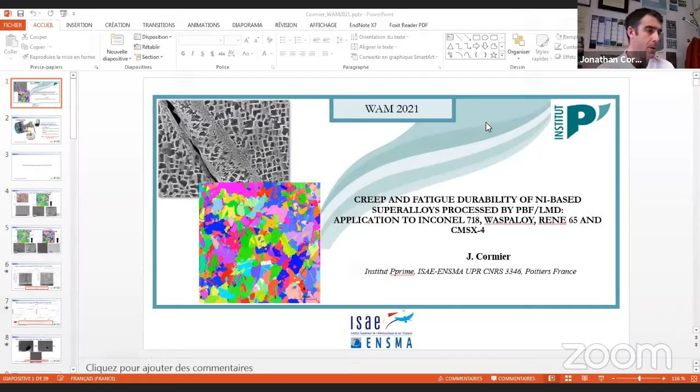Thanks, Guillaume, for the nice introduction. So I will share my slide. Oh, I think it's not this one. Just a moment. Okay, can you see my slides?

Yes, okay great. So today my talk, being in an engineering school like ISAE-ENSMA, naturally we are working on applications for aerospace. My talk today will be mainly focused on mechanical properties of high temperature materials processed by additive manufacturing, more specifically powder bed fusion and laser metal deposition.

My talk will be focused on different kinds of alloys, ranging from 718, WASPALOY, RENE 65, and CMSX-4.

So to start with the context of this study, we deal with materials which are typically used for the hot sections of gas turbines, not only for aero engines, but also for industrial gas turbines, or sometimes petrochemical applications or turbochargers for cars, Formula Ones. But we mainly focus today on applications for jet engines and helicopter turboshaft engines. Those alloys are used for the manufacturing of discs, seal rings, and airfoils, blades of the hot section, so for the HP sections, low pressure turbine sections, but also for the very last stages of the compressors.

Here you have the typical temperature during service of those components, ranging from 400°C in the bore sections up to 700°C for the rim sections. Regarding airfoils, especially HP sections, we are ranging from 500 to 700°C for the blade roots, up to 1150°C at the blade tips.

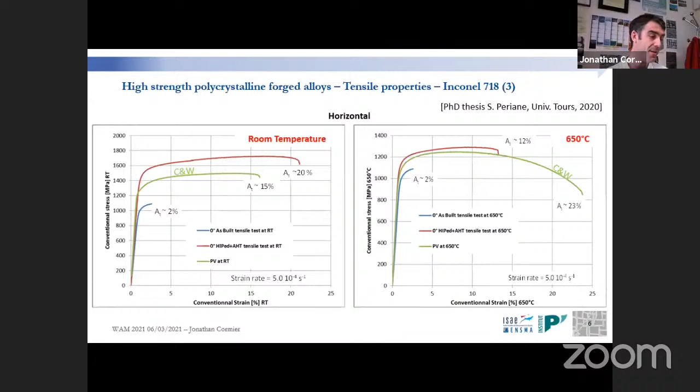From a failure point of view, we can see this linked to the lack of ductility. Crack initiation is mainly coming from lack of fusion and pores remaining in the as-built material, while in the HIPed state we don't have any more, or very few of them, at the end.

If we move now to creep properties, we have been testing creep properties at 650 C, 800 MPa and 750 MPa, with the same time scale here, in which we compare the powder bed fusion 718 - the red curves here - and two types of forging: hydraulic pressed forge 718 and screw pressed forge 718, the processes used for processing HP discs and LP rings for aero engines. What we can see in both cases is that the curves are pretty much the same in terms of primary and secondary creep stage, up to 1 to 2% creep strain.

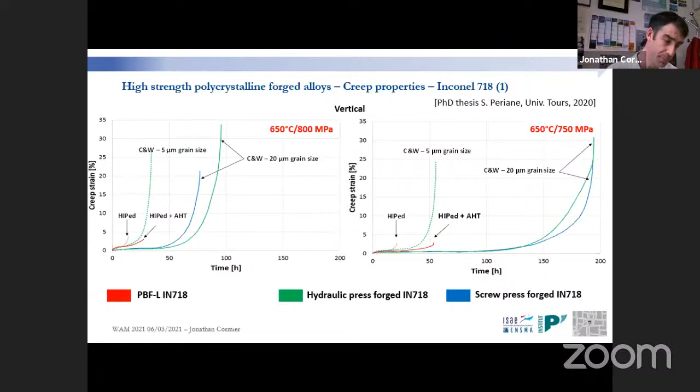Still, there is a very pronounced lack of ductility, which prevents the alloy from being used in that state for such high strength, high integrity components. The main reason behind that, as you will see later, is that even in the heat-treated state we always have some remaining pores, small ones, where we probably have gas trapped within them, but they serve as crack initiation sites and limit the overall ductility of the alloy.

Moreover, we have been able to observe crack initiation at specific grain boundaries. I'm not showing this here clearly, but we understood that it is linked also to some oxides remaining at grain boundaries. This kind of result is really typical in the literature.

That's something which has already been observed four years ago by a Japanese team in the group of Koji Kakehi at Tokyo Tech, where they compared the creep properties of vertical and horizontal specimens. I forgot to mention that the results we obtained were within the framework of the S. Periane thesis. We had a little bit of anisotropy, but the trend was almost the same for both vertical and horizontal specimens.

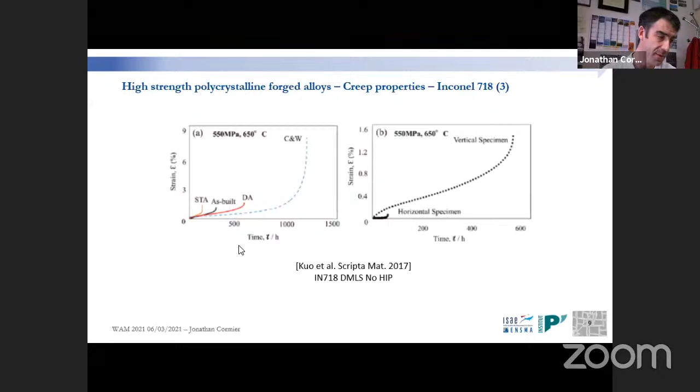If we come back to the very pioneering work coming from Oak Ridge National Lab, the group of Michael Kirka and Suresh Babu, they made the choice quite rapidly to work with EBM processing. They observed that for specimens loaded along the build direction, the microstructure for this kind of process leads to a very columnar type microstructure. They observed very high properties, comparable or sometimes even surpassing the creep properties of cast and wrought material. But when loading along the transverse direction, they come back to the same problem of deficit in ductility.

This kind of anisotropy in creep strength, found for both PBF-E and PBF-L processing, is not something specific to this class of processing - it's not specific to AM. It's really specific to the columnar type or directional type microstructure we have, in which we know that if we don't have any particles or something specific to strengthen the grain boundary, we have an overall lack of ductility, and that's something well known in the literature for directionally solidified cast superalloys.

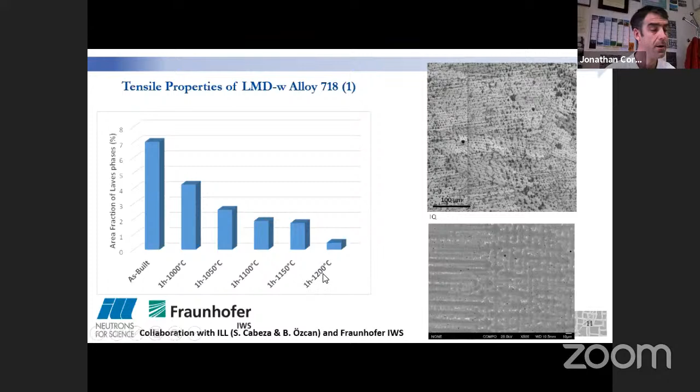So in the following slides, I will show you that we are using solution treated specimens to understand the properties, with the solution treatment being 1 hour at 1200°C.

With this, we have been doing tensile tests along the horizontal direction, vertical direction (build direction), and also at 45 degrees. All the tensile tests have been done at the same strain rate, 5×10⁻⁴ per second, at room temperature, 450, 650, 750, 850. So I will first start with the room temperature test.

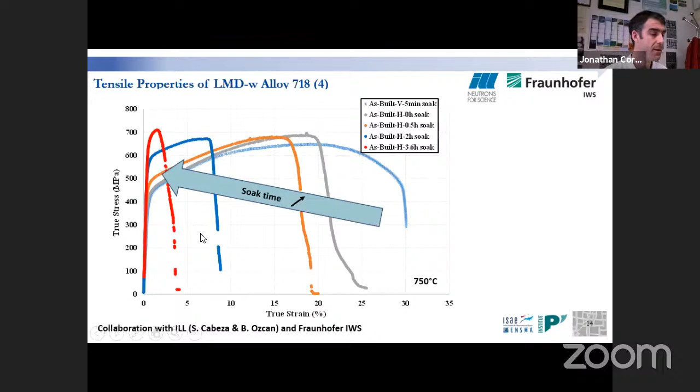While the decrease in ductility we suspect to have environmental embrittlement of grain boundaries. So it means that we need to take great care on the testing procedure if we want to characterize the properties of this class of alloy, which is unstable in this temperature range.

Okay, so after those monotonic properties, I want to move to something really important when we need to consider certification rules of components for aero engines, so the fatigue properties especially. According to the literature, focusing on AM material, I'm still considering the case of 718, which is a weldable alloy.

I just want to summarize rapidly that most of the issues are coming from processing defects, typically lack of fusion and pores. And as long as we have this kind of defects inside the materials, the anisotropy, the way the specimen is built, is not really important in terms of texture, for example.

So if we want to be able to characterize intrinsically the properties of this class of material, we need to get rid of defects. That's also something interesting for wire deposition, being a process in which we know we have lower porosity in terms of volume fraction and/or size.

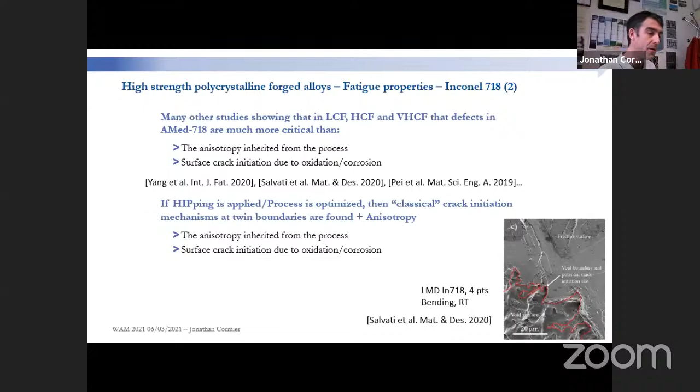So we have been working in collaboration with GE Additive in the US and with a colleague from the University of Arizona, working on Rene 65. So an alloy very difficult to print, with a very high volume fraction of gamma prime precipitates.

And we have been studying the alloy along vertical and horizontal directions, using combined solution treatments plus HIP. These are optimized processes to be able to get rid of porosity. We have typically less than 0.1% pores. I cannot give all the details on this.

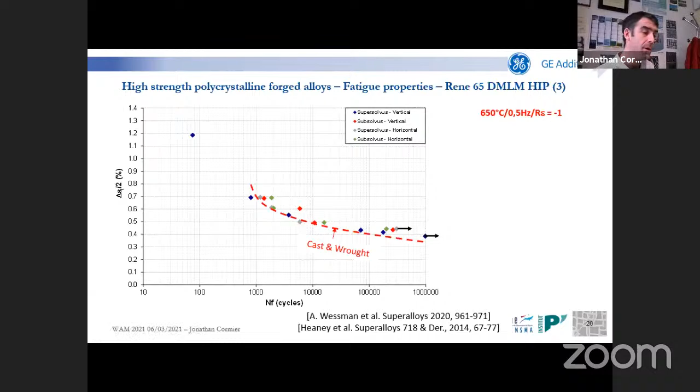From the point of view of crack initiation, we observe almost the same crack initiation as for the cast and wrought material, meaning surface crack initiation at this temperature. That's really typical. We have crack initiation at twin boundaries assisted by oxidation. And very occasionally, we obtained crack initiation from an internal site at a particle, non-metallic particle, typically an alumina type particle coming from the processing of the powders. Most probably, I don't have all the details from GE on this.

So that's something very interesting in terms of the possibility of introducing this class of material for high integrity components. Still, we need the HIPing stage. But there are no other possibilities.

Now I'd like to move to something really fancy. We are working in collaboration with the colleagues of the University of Erlangen, and more specifically with the group of Carolin Körner. There are 2 groups on Earth able to grow, I would say, almost single crystals. So it's not really single crystals. You can see here a specimen, which has been processed by powder bed fusion electron.

You can see that with this optical observation, you have this central part, which is basically almost single crystalline. And the strategy here, like for Bridgman casting, is to establish an almost vertical thermal gradient during processing. So a very hot process overall. They are obtaining a very, very small dendritic structure with primary dendrite arm spacing of typically 10 to 20 microns, meaning that you can then do solution treatment at lower temperature or shorter durations. They have been able to obtain a microstructure very similar to a conventionally processed single crystal.

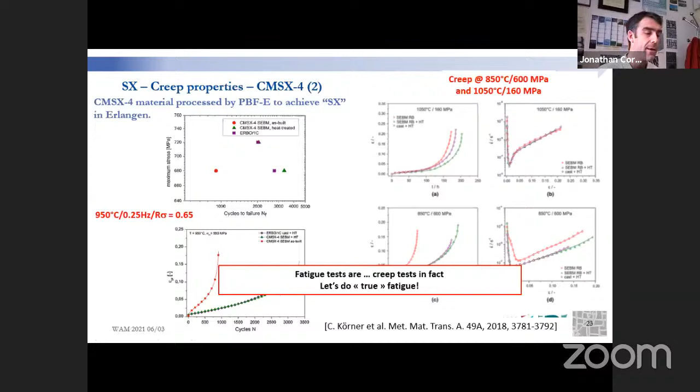So what we did, we decided to work together and do a true fatigue test, and especially to do VHCF, very high cycle fatigue tests. There are very few teams able to do this kind of test on Earth, only 3 teams: one at UCSB and University of Michigan within the groups of Professor Pollock and Professor Wayne Jones, here at Pprime, and another group in China at Beijing Institute of Technology, working closely with Leicester University.

Basically, the principle is to design a specimen so as to reach the frequency of resonance of this specimen at 20 kilohertz. Those conditions are really important from a certification point of view, because airworthiness authorities are imposing criteria with respect to high cycle fatigue, very high cycle fatigue failure at such frequencies, because a blade can vibrate in bending mode during service, and we need to take into consideration possible failure due to this.

So the machine we have, and we have a second machine under development here, we are typically using induction heating, temperature measurement with a pyrometer, and we are coping with possible self-heating during the test. We have been able to establish a very, very large database, probably the largest on Earth for this class of material at 1000 C. And that's not all the data points we have. We are more than 400 data points at this condition, with results up to 10 to the power 10 cycles. Most of the tests have been done by Alice Cervellon and by this lady, Luciana Maria Bortoluci Ormastroni, working on CMSX4 processed by additive manufacturing.

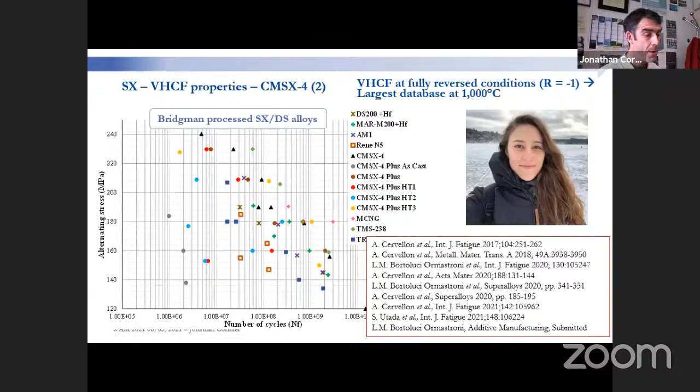I'd like to show you more specifically the results on AM process CMSX4. Here we have a database of CMSX4 processed with large casting, meaning very large casting pores. Database of CMSX4 processed with small casting pores. And in all those cases, we have crack initiation at internal pores, the largest ones. Here you can see AM specimens which failed almost immediately because we had the presence of high-angle grain boundaries.

I just want to go back a little bit earlier. If you can see here in those blanks, we have polycrystalline shells around, and when we do a heat treatment or when we add a HIPing stage, we may have a growth of this layer up to areas from which we are removing our VHCF specimens. And from this, we can see that the VHCF test is really a killer test because we have almost immediate failure.

Also, during those tests, something you can observe from this SN diagram is that we have not been able to achieve very high alternating stress simply because we have been facing self-heating. And the reason behind that is that the material is full of dislocations inherited from the process, and we have difficulties getting rid of those dislocations.

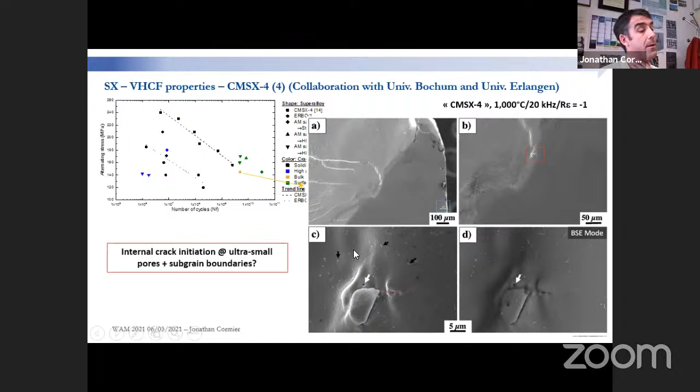And we have been able to observe crack initiation from an internal site, which should be, and we are not 100% sure about that, a low-angle grain boundary, because it was a HIPed specimen. And all the other specimens failed from the surface through an oxidation process. That's the longest ever test we did, which lasted more than 500 hours.

So I don't want to go into too much detail on the failure process because I think I will be lacking time. But with those experiments, we have been able to identify an environmental limit for this class of material, and probably there is no fatigue limit for this class of material, whether processed by conventional processing, so Bridgman casting or liquid metal cooling followed by HIP, or processed by additive manufacturing.

Okay, so now I want to finish regarding the question of additive manufacturing as a repair technique. That's where the market is. Personally, I really trust the fact that this is where we should introduce additive manufacturing for aero engine applications and for repair purposes. So we have a large program running here at Pprime with the collaboration of Safran Aircraft Engines.

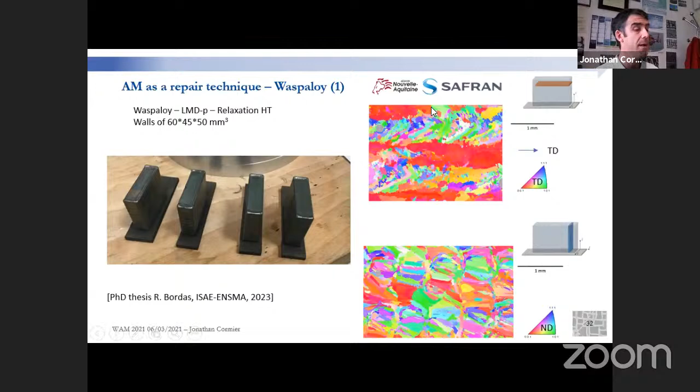And the first thing we are studying is the role of heat treatment. Since we are repairing components, the question is what kind of heat treatment we can apply without degrading the properties of the substrate we want to repair, but improving the properties. And that's a tricky issue.

And what we learned from that process is that just after the CMT process, we are out of equilibrium. And that's important when you think about the relaxation of residual stresses, because on the one hand, you introduce residual stresses due to the thermal field and the buildup of dislocation density within the material during processing. But on the other hand, you need to think about improving monotonic properties without degrading the substrate, which is a tricky issue.

And we have experiments starting next week with Sandra on the Salsa line to understand how we can develop heat treatments to both relax stresses and trigger precipitation to optimize subsequent in-service properties.

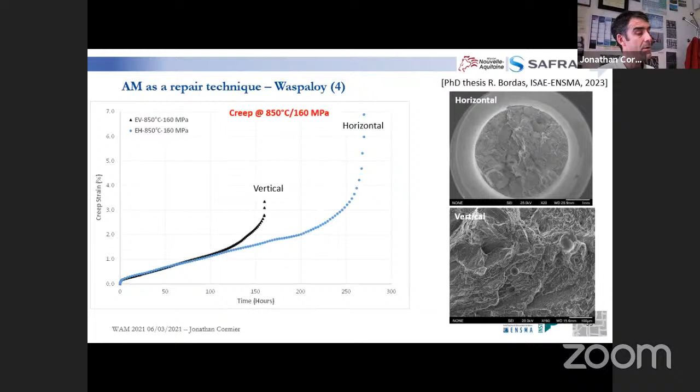This is something we are understanding from the pore size distribution and spatial distribution within the build. We have plenty of results; I'm just showing two typical ones. We also did vacuum tests whose creep life in this condition exceeds 800 hours. That's something we are also trying to understand.

Finally, the key challenges for us are the following. Here is a typical component we want to repair. I cannot give exact dimensions since that's confidential, but it's a part having a diameter of nearly one meter, and we are repairing the sealing parts, which are typically a couple of millimeters in thickness and a couple of millimeters in height.

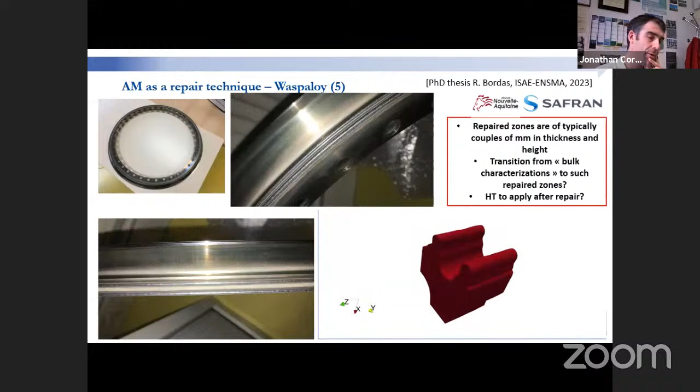Here you have a tomography reconstruction of this kind of repaired part, and we have a given pore distribution typically different from the one we have in the walls. Our strategy is to build walls with different processing parameters, meaning different pore distributions, so as to probe the mechanical properties of those very small parts from which we are not able to extract specimens for conventional creep and fatigue tests.

That's a very specific topic for which we need modeling tools to approach the properties of those parts, which are typically submitted in service to creep deformation and fatigue fretting issues. To conclude, for this class of material, high-strength nickel-based superalloys, fatigue properties and, to a lower extent, creep properties are mainly controlled by defects inherited from the AM process, typically pores and lack of fusion. Once these defects are removed or limited through HIPing, for example, anisotropy and environmental degradation may contribute to creep and fatigue properties.

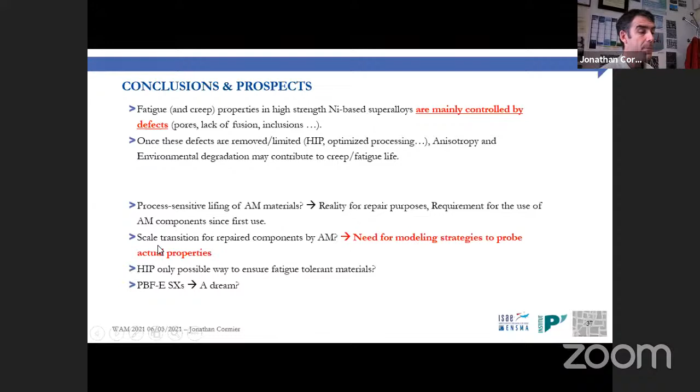I don't want to read everything here, but we really need to develop modeling strategies to probe the actual service mechanical properties. With this, I'd like to thank all the colleagues, collaborators, and companies without whom this work would not have been possible.

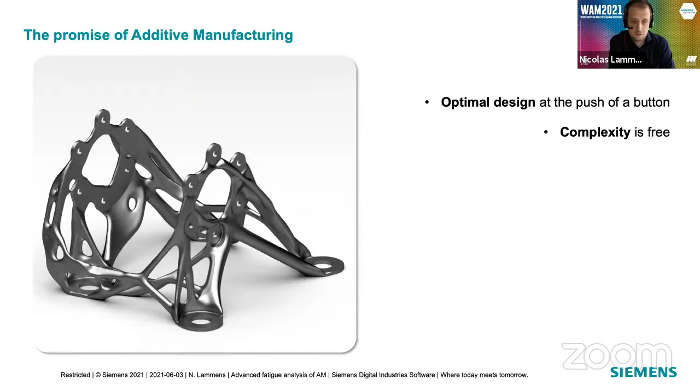Now, in itself, that's all very nice, but if we look at what the cost is of this extra freedom that we get, that introduces us to the problem of performance prediction of additive manufacturing.

What's happening is that all this increased flexibility we have, all this process control that we get, leads to a significant increase in complexity.

If we talk about performance and focus on fatigue life, in a normal analysis you would consider three distinct properties: the geometry of your component, the material that you're going to use, and the loads being applied to your component. If you know these three as individual properties, you can predict a fatigue life. That's the normal way of looking at fatigue for conventional manufacturing.

But when you step into the domain of additive manufacturing, you have to start taking into account the manufacturing process itself. Because of that single extra layer, all these domains start to interact with each other. The material performance becomes dependent on the manufacturing process itself, but also on how you orient your component within the build chamber, on the printer settings used, and on the geometry that you have—thin-walled features will have local material properties that differ from the bulk material. Also, if you cannot print the precise geometry, or have features you must redesign because of the printing process, the load introduction might be different. So everything starts to interact with everything, and predicting fatigue life becomes even more difficult than for conventional manufacturing.

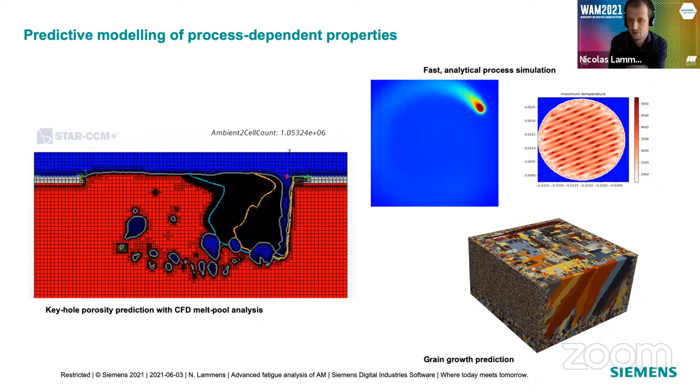And if we have those, we can actually look towards things like grain growth prediction, what you see here at the bottom. Our final goal is to be able to capture everything that happens during the printing process, to know what features you can expect in your component, and then to predict from that the performance of your component.

Now, to be able to predict the performance of the component, there is a second challenge. You not only want to know all the properties or all these artifacts, but you also have to be able to know how these will work together to get to a certain fatigue life.

If you look at the top picture here, this is a literature study done on Ti-64, additively manufactured Ti-64. And what you can see is that depending on the precise type of processing done on the coupons, you get a fatigue life that has a huge variation.

So this means that if you want to accurately predict lifetime of your component, you actually have to know pretty accurately all the process parameters or the precise condition of your component, because if you don't, you have no way of picking the right SN curve from this scatter plot.

What we know is that in order to predict fatigue life, we actually start from the AM properties—things like printing direction, post-treatment, energy, velocity—and all those properties affect the local properties. So not the global properties, but actually very local properties like surface roughness, residual stress, and microstructure. And all those local properties then finally come together into the final component fatigue life.

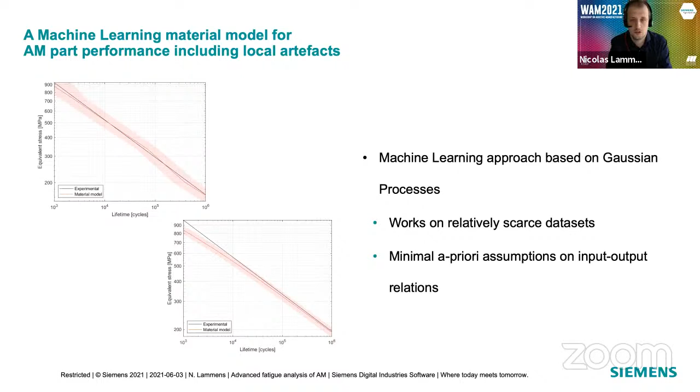To illustrate briefly the results we've achieved so far, I wanted to show some results from a steel turbine blade analysis. It was a 316L stainless steel. To build our fatigue material model, we started with simple coupon test data, doing high cycle fatigue testing. All of them were printed in 316L, but with a fixed set of processing parameters. The only things we changed were print orientation, surface condition, and the heat treatment applied. That gave us a small set of test data to train our machine learning model.

The input parameters we considered in this study were surface condition - the roughness of each sample - the print orientation, because we wanted to account for orthotropy in the material, and the heat treatment applied to the samples. The pictures on the left are two actual results from our machine learning using a leave-one-out principle. What that means is that from all the SN curves you have from testing, you take one out of the training data.

You train your model with the remaining set, and then you predict that one SN curve that you removed from the training data, and you compare it to the actual measurements. That's what you see for two different conditions here in the pictures. The red line is the mean prediction, the light red shaded area is the standard deviation, and the black marks are the test points.

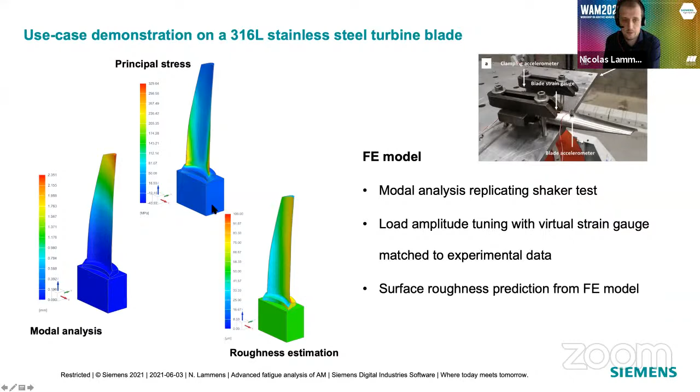And then if we look at the first results we got, if we just look at the durability results and the stress results, we see that failure is actually predicted at exactly the location where we saw it in each of the experiments that we did. But more importantly, if we look towards the actual numerical predictions, we see that we get still very good results.

And normally you have to account for that. You have to compensate for the notch effect. And we did not implement this yet in this study. So we are confident that if we would implement this notch compensation, that our prediction would match even better with our experiments. So that's a very promising result, but of course, it doesn't mean that we are there yet.

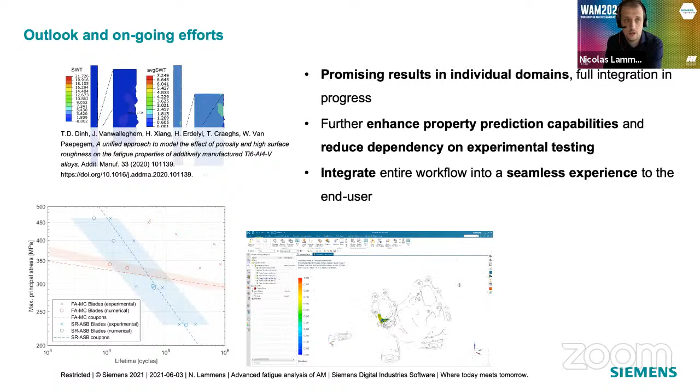So what we want to achieve then, first of all, we want to be able to predict these three different domains: the manufacturing process itself, the resulting material properties, and the individual properties such as porosities and microstructure. And then based on those properties, we want to predict part scale performance. Once we are able to predict that, we actually want to reverse the problem. We want to optimize the manufacturing process based on what performance we need to achieve. And ultimately, once we are there, this will enable us to tailor the printing process to achieve exactly what we need. And that will still, again, allow more optimal material usage, faster printing, and it will just reduce the cost of additive manufacturing. So that's the ultimate goal that we have here.

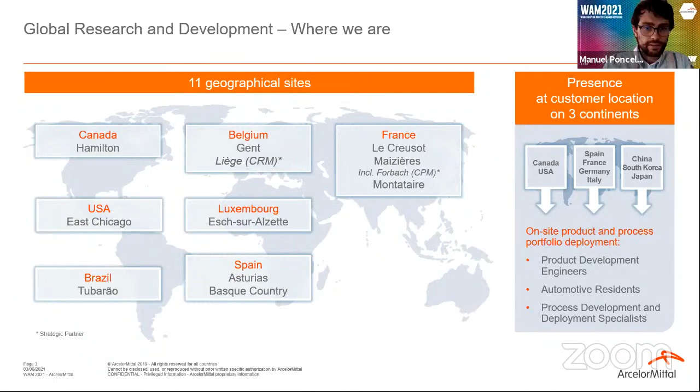Also, we have a big global R&D network located in 11 different places, most of them here in Europe, but also we have some in America, like the ones in Canada, East Chicago, and Brazil. We are in the north of Spain, where we have three centers, two in Asturias and one in the Basque Country. I belong to one of the centers in Asturias, which is called New Frontier.

Here we study or research hot topics like big data, machine learning, and data mining. This is the digital factory, new materials and nanomaterials, 3D printing, which is the department my colleague Juan Manuel and I belong to, sustainable resources focused on ArcelorMittal mines, and since the COVID-19 outbreak, we started to develop a new lab called BioLab for activities to fight against COVID.

So now entering into residual stresses in additive manufacturing. Usually people have a bad image of residual stresses because they can lead to catastrophic failures, especially when they are not accounted for, and that's right. But it's also true that sometimes residual stresses can be beneficial and are induced intentionally, for instance to improve fatigue performance, like shot peening or some examples that have been put on the table in previous talks from today. And why are they important to measure in additive manufacturing?

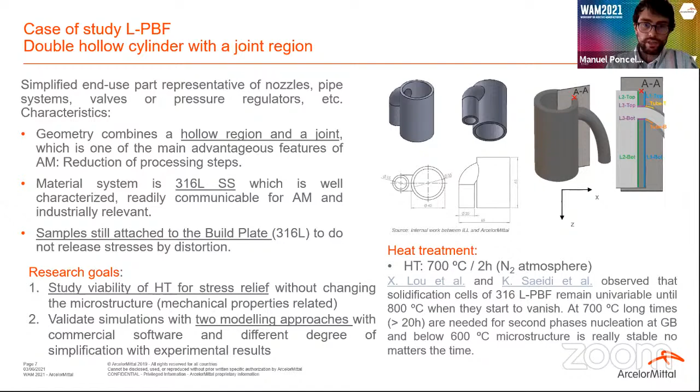So we did a metallurgical analysis of both components, the sample as built and the sample heat treated. We had already developed the printing parameters for this steel previously, so we could assure a full dense part without macroscopic defects — no porosity or cracks inside.

Looking closely at the microstructure by SEM images, we saw a very fine microstructure with fine cellular solidification cells, with average diameter below the micron. This microstructure was also preserved after the heat treatment, which is good — that's what we intended.

We measured this cross section by lab XRD, on both samples and also powder from the same printing batch, and we saw a mainly austenitic phase for this steel, which is not surprising, as this steel is very well known to be mainly austenitic. This is also an important input for measuring the residual stresses, to know the microstructure we have initially.

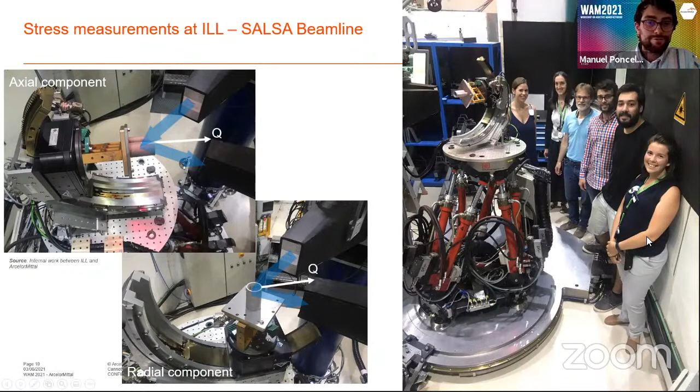So here is when we brought the samples to SALSA. We measured the three main stress components of the samples, aligned with the scattering vector — the axial component, the radial component, and also the tangential component. And here are the happy faces after successful measurements and results.

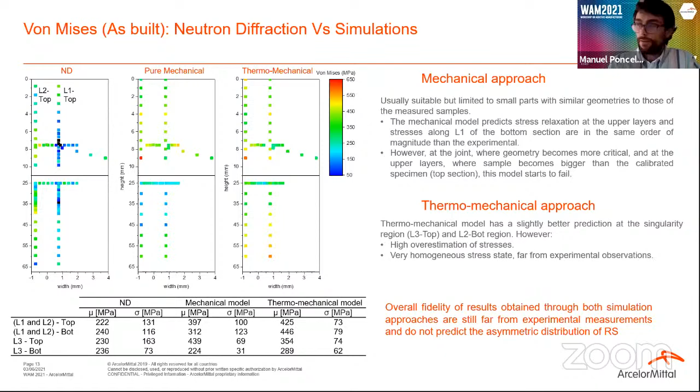So I conclude the talk, summarizing everything we were explaining. First, we propose a heat treatment for 316L in SLM that is good for reducing the residual stresses without modifying much the microstructure, which is what we wanted. In this line, we are now running tensile tests on specimens after this heat treatment to assess the mechanical behavior as-built versus after the heat treatment.

We compare the experimental results with two modeling approaches, and none of them predict accurately these stresses. This is because, first, the degree of simplification, the voxel size of the mesh is much bigger than the melt pool, and also because at the end of the day, the main purpose of both models is to predict the macroscopic distortion of the part, and they do it right. But what they do not do right now is predict the residual stresses.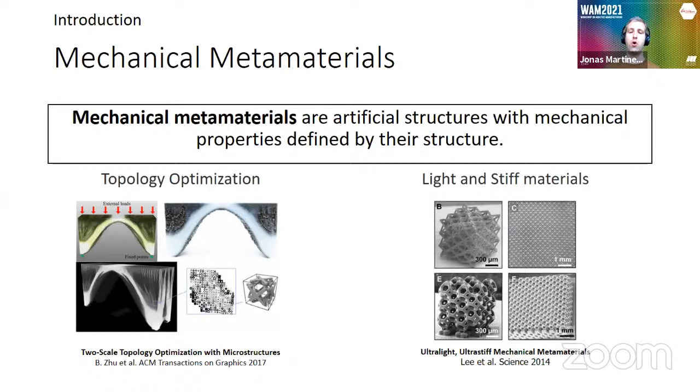Another line of research that has also gotten a lot of attention is how to do, at the small scale, materials that are at the same time light and very stiff.

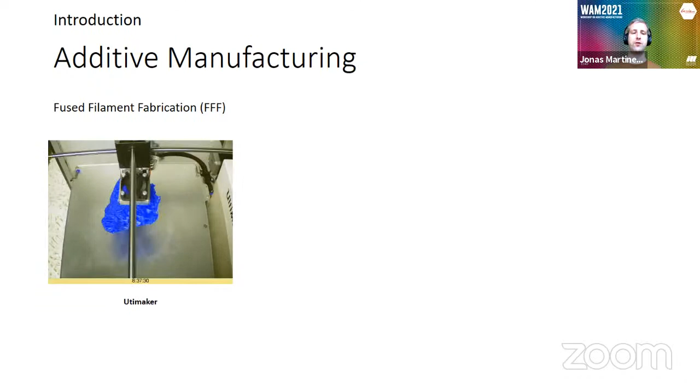I'll give an overview of additive manufacturing, but I think here the audience is pretty well versed on that. We consider in our department three different technologies. The first is the most widespread and inexpensive: fused filament fabrication, where you deposit material layer by layer usually.

We also consider stereolithography apparatus, where you are basically photopolymerizing, also layer by layer, but instead here you are not sending instructions of a path, but instructions of an image for each slice. And we also have some selective laser sintering machines.

What I want to bring to discussion is that when we're designing the algorithms to generate small scale structures, we have to take into account the fabrication constraints imposed by these technologies. So not all ranges of geometries are actually fabricable.

For instance, to take a simple example with fused filament fabrication, usually you need structures that are self-supporting, or you need the use of supports. So basically, the space of geometries that you can achieve is constrained.

Our common strategy in the works I'm going to present is basically to find a subset of geometries that strictly enforce the fabrication constraints, and that at the same time expand as interesting and wide a space as possible of elastic behavior.

The most commonly used method to do metamaterials is to consider a periodic arrangement of tiles. This is because we can very efficiently simulate the asymptotic behavior of this kind of tile, and also it's very compact for storage.

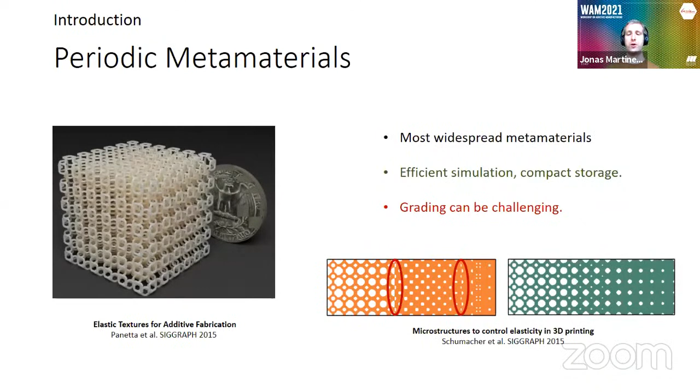However, as many recent works have noted, there are some challenges when you want to do spatial grading of properties. For instance, imagine you have two different sets of tiles with different geometry and topology—interpolating between one and the other is actually a non-trivial task.

So the common tool used by all these approaches usually is to consider homogenization, more precisely periodic homogenization. This allows us, given a representative volume element that is periodically repeated, to extract what is the homogeneous material behavior, considering that this representative volume element size tends towards zero. The assumption is that we have something very, very small, and then we obtain basically the average behavior.

Another line of research, which is the one we focus our research on, is stochastic metamaterials, or random arrangements of metamaterials. These are less widespread metamaterials. One possible explanation is that it's a little bit costly to simulate their average behavior, but they have some very interesting properties.

One thing we really focus on is that they allow us usually to do implicit grading of the spatial geometric properties. For instance, here you have basically a foam where we are grading very progressively from almost solid to almost void density. So in the remainder, you will see that with these stochastic metamaterials, we can do implicit grading, as opposed to periodic materials where you have to take care of the boundary between the tile geometries.

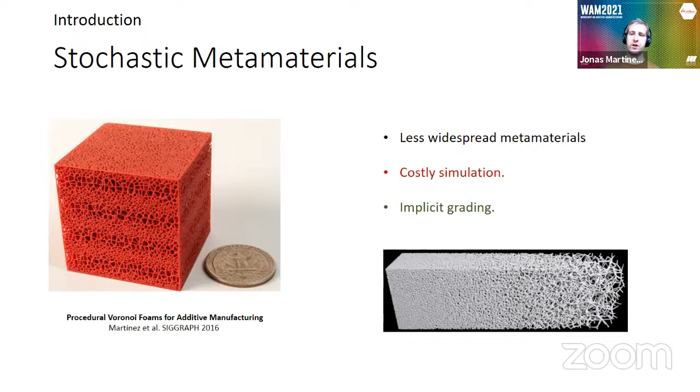For stochastic homogenization, in order to compute the average behavior, we use a very simple technique called cutoff techniques, which basically consists of considering a periodic homogenization sample. Then the question, which is non-trivial, is to consider what is the window that will give you a good approximation of the average behavior of your random medium. And we know that for some kinds of random materials, this approximation actually converges.

Last, some of you may have noted that actually our background is in computational geometry and also in computer graphics, and you may wonder why we ended up doing metamaterials. So here's the reason.

Back in the 80s, there were some authors in computer graphics who were interested in devising algorithms to do solid structures in a very efficient way. We call that procedural. In algorithmic terms, this means that you can evaluate for any point in space whether it is solid or void, with constant time and constant space complexity. This means basically that we can generate arbitrarily large microstructure geometries.

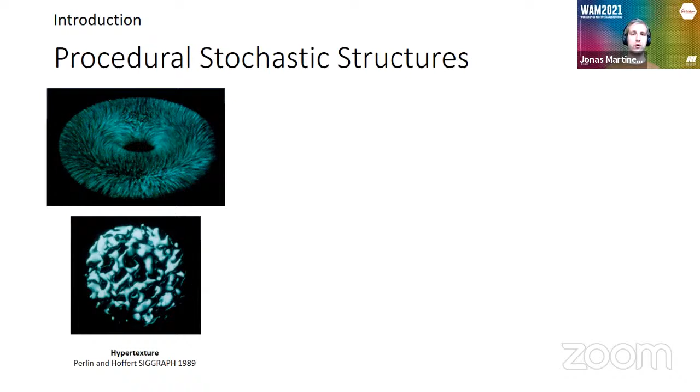And I want to stress that we never generate a mesh. So basically, what we always do is directly generate the instructions that are sent to the machine. This can be either G-code or an image, but we never pass through the step of generating a mesh, which is actually non-trivial, and we usually incur loss of accuracy when we do generate a mesh.

So here you have another example of procedural structures. And if you want to play with them, you can go to Shadertoy on the internet, where you can see different examples. What you can see basically is that these structures are entirely defined by a code, so they are not stored as a mesh, but they come from a procedure.

So here is the general procedural pipeline for additive manufacturing. Usually we print planar slices. So at some point we have a slice, and we want to generate the geometry inside this slice. We have some function that, for some coordinate X, Y, and Z, tells us if it's solid or void.

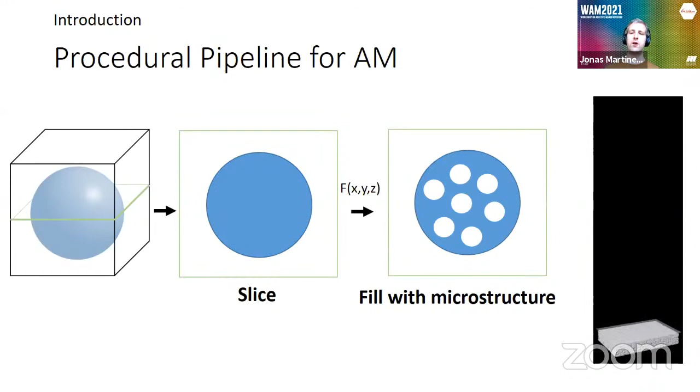Just with that, we are able to generate arbitrarily large microstructures, because we only use this predicate — we are never storing the geometry. So we call this line of research procedural foams.

We have three representative examples to show. The first one is targeted to SLA and SLS. I'm going to put the video again. We had the following fabrication constraints: basically, you cannot have local minima when you print, otherwise it will not properly be attached.

And in this kind of technology, you cannot have enclosed voids, because they will trap the resin inside. So we thought that having a structure with convex cells would be nice, because then we can ensure that we have no local minima, and if these are open cells, we have no enclosed voids.

So of course, the most trivial option is to just consider the edges of a 3D Voronoi diagram. For those not familiar with Voronoi diagrams: imagine you have a set of points in space, and for each point you consider the set of points that are closest to this one rather than to the others. This induces a partition of space into convex cells, which you can see to the right, and if you take the edges of these convex cells, you get the structure.

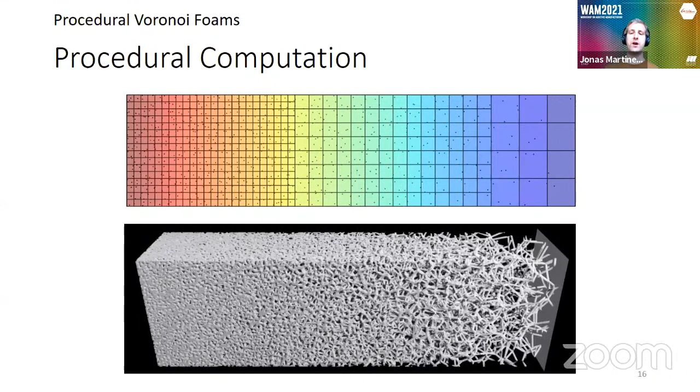I'm not going to enter into details, but we devise a very efficient procedural computation approach that's basically some lines of code that can be parallelized with the GPU, so it can be done massively parallel. Finally, we also did some numerical homogenization.

We actually found consistent results with the literature. Voronoi diagrams have basically this kind of behavior where the relative volume is correlated with the Young modulus following some kind of power law. Also the Poisson's ratio remains fairly stable along with the Poisson's ratio of the solid material.

So here you can have a glimpse of some of the results we did. These were printed with an Autodesk Ember, which unfortunately is not available anymore. You can see that we were able to print very low scale structures.

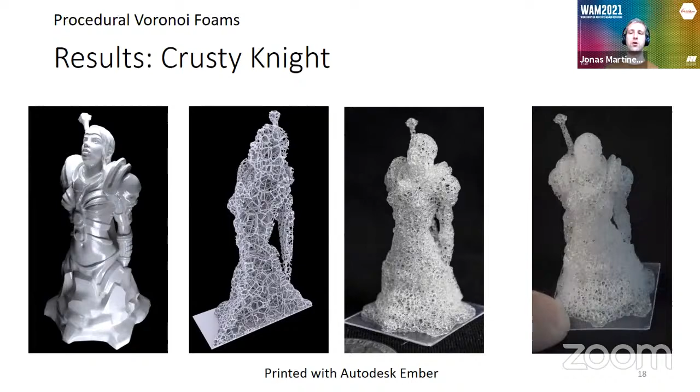So let's go to the second metamaterial that we devised in a procedural fashion. This one was not an isotropic material as the Voronoi foams, but was an orthotropic one.

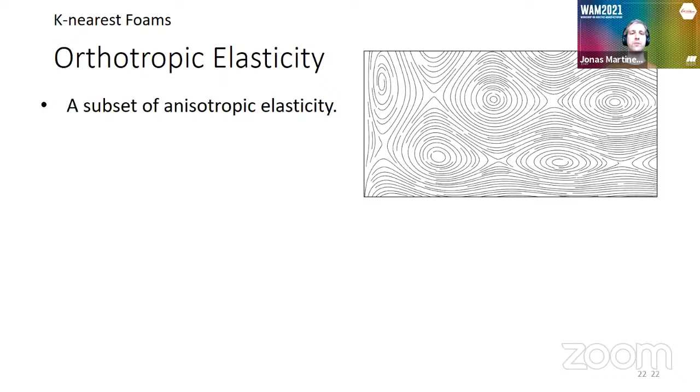I'm going to assume also that all of you are familiar. Orthotropic elasticity is actually a subset of anisotropic elasticity. Basically, given some orthotropic frame, the elasticity varies independently along some orthogonal axes.

So here is what we obtained with our approach. I'm not going to enter into details, but basically we were seeking for some material, such as wood, that have better adaptation to uneven loading scenarios.

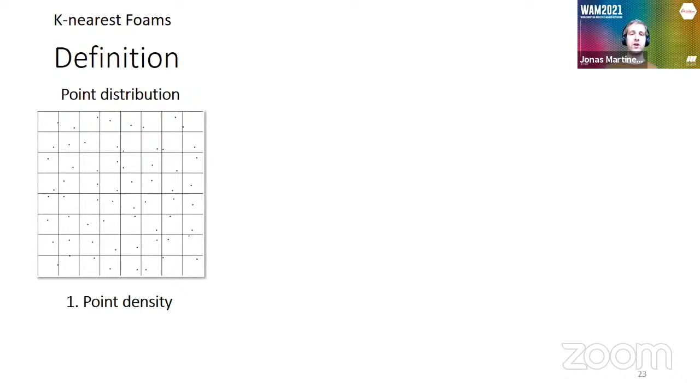Algorithmically speaking, we also have a control of the point density procedurally, and what we consider is the k-nearest graph of this set of points. A k-nearest graph is basically, imagine that for each point, you connect it to the k-nearest ones under some specific metric, not the Euclidean one, but a stretched metric.

It's the Euclidean one plus some affine deformation, and we can control the angle of this metric and also the stretching factor. Finally, we have another parameter, which is the beam thickness.

This leads us to a structure that has an orthotropic behavior. More interestingly, the orthotropic axis is aligned with the metric angle. So this is what we verified here.

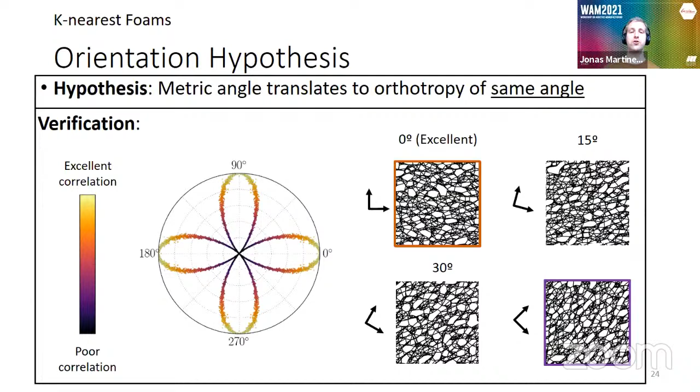As you can see, we have different angles. I'm not going to enter into details of this plot, but basically it shows that the orthotropy is aligned with the direction of the stretch of the metric.

We also did some tests with help of people at Institut Jean Lamour, which is an institute of material science in Nancy, to verify the correlation. We also got some close agreement between experimental and simulation.

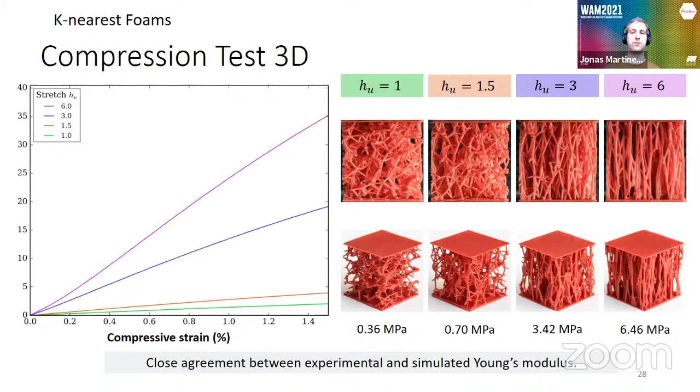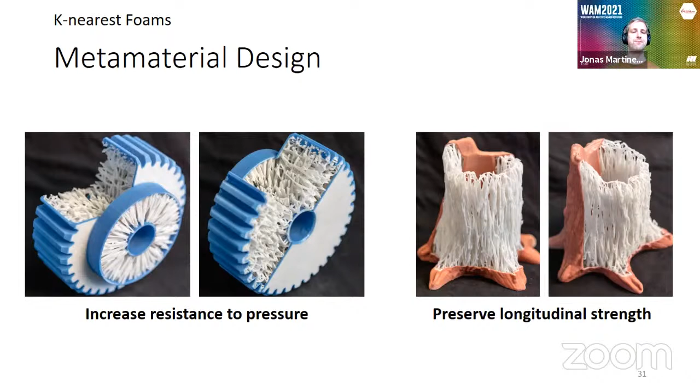And finally, I'm going to show the last work. This one was basically a work focused on fused filament fabrication.

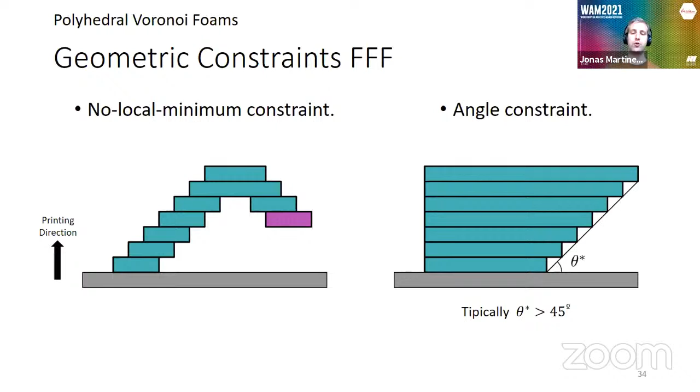So as I said, fused filament fabrication is a very inexpensive and popular fabrication technique, and has a wide spectrum of materials, so it's interesting. However, it has very strict constraints when you look at it from a geometric point of view. First, you cannot have a local minima, because due to gravity it will fall when you're printing layer by layer. Then there is a second constraint, usually called the overhang constraint, which tells you that when you're depositing one layer over the other, you cannot pass some limit of angle. Usually it's 45 degrees, but it can be others depending on the material.

There have been different works on doing metamaterials, internal structures for fabrication. They can be usually broadly categorized as closed cell or open cell, depending on the kind of cell. We could focus mostly on closed cell because the deposition trajectories are continuous when you look at the slice. The open cell is much more challenging because you have to travel the nozzle from one point to another, and this leaves spurious plastic things.

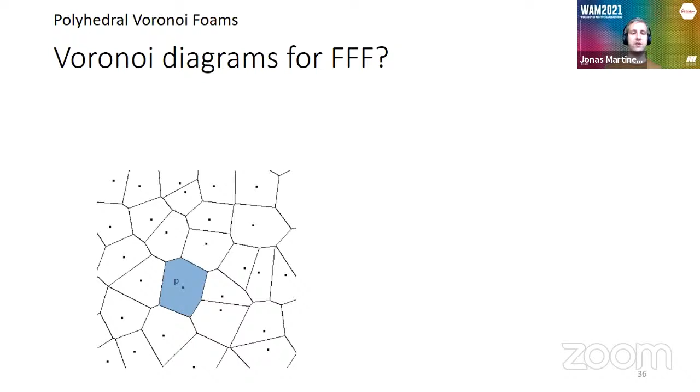So the first thing we thought was, okay, let's take the Voronoi diagram and apply it for fused filament fabrication. Here you have a 2D example. This is a set of points, and it uses a partition of the space. However, if you look at some edges of this diagram, you will see that some of them actually violate the angle constraint - with respect to the printing direction, the relative angle is greater than 45. Some previous work has used Voronoi diagrams, but actually they have needed to use soluble supports in the interior, and we completely discard that because we wanted to scale, and this is quite tedious to remove.

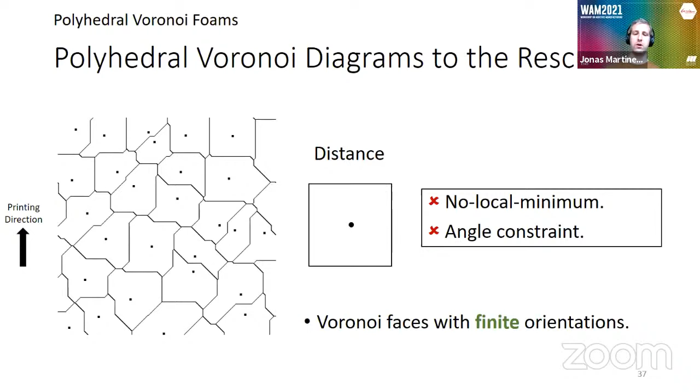So here's our intuition. We wonder, can we do something with the metric in order to ensure fabricability? Of course, with the Euclidean metric, it's not possible because the Voronoi faces or edges in 2D can have any arbitrary orientation. But if you change your metric to a polygonal metric, such as a square, you can see something interesting happening - basically the edges of your Voronoi cells have a finite amount of orientations. Here, as you can see, it's either horizontal, vertical, or up to some rotation of 45 degrees. Our intuition was that there must exist some distance such that we can have a finite amount of orientations and we can have no local minimum and angle constraint. Trying just this kind of triangle distance proved to be successful in 2D.

So we wanted to extend that to 3D. Let me explain a little bit what it means to measure a distance with a polygonal distance. Imagine that you have a convex polygon P, and a point Q contained in the interior of P, and you want to measure the distance between P and Q. The distance is basically, intuitively speaking, the scaling factor that you have to apply to P in order to touch Q. So this is this more compact formula below - this is basically a measure between 2 points.

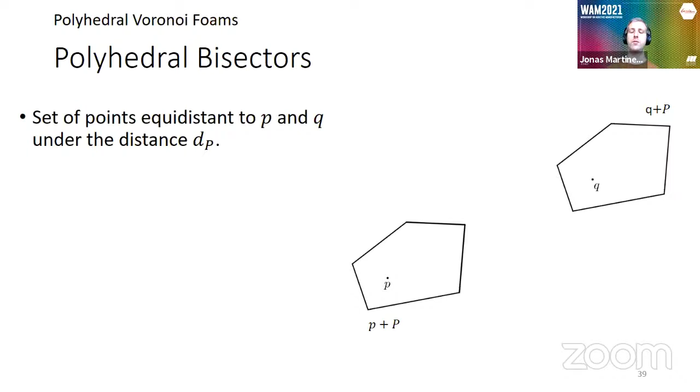Now we focus our interest on what happens with the set of points that are equidistant between 2 points under some distance. For the Euclidean metric, it's basically you put a line between P and Q and you get the perpendicular bisector in the middle. This is very easy. But with these kinds of distances, you get more strange bisectors. But we know from theory that they are linear - composed of linear patches. More importantly, they are homeomorphic to a plane. This means that we don't have isolated pieces of the bisector. And that's the key property we exploit - each bisector face is actually defined by the interaction of 2 facets. I'm going to enter into details of that.

So let's go back to the example of the triangle. Let's say we want to verify that our Voronoi diagram is going to always verify the constraints. So what we do is basically enumerate all the kinds of angles that the bisector can have - with a triangle it's basically these 3 in blue. Then we also need to enumerate all the kinds of bisector vertex configurations - actually there are only 3. As you can see, this is a combinatorial problem. And we have a lemma that tells us that if all the bisectors verify these constraints, then the Voronoi diagram also verifies these constraints. So we can prove that the Voronoi diagram is self-supported.

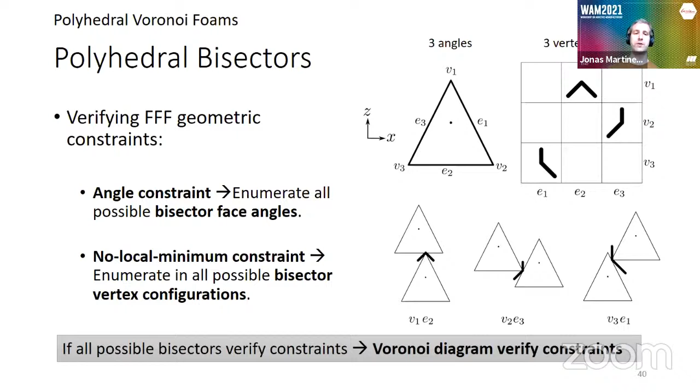So in 3D, what we did is extend the idea and consider a cone that has some base. The apex follows the printing direction Z. We get some parameters: the first is that this base is a regular polygon, so one parameter is the number of edges. Then we have another parameter that controls the angle between the origin, the center, and the base. Another parameter mu considers the ratio between the origin and the lateral side. Finally, we have linear scaling applied in the x direction. I'm going to put all these parameters in a visual action, and of course a rotation - we can also rotate this cone. Let's have a look.

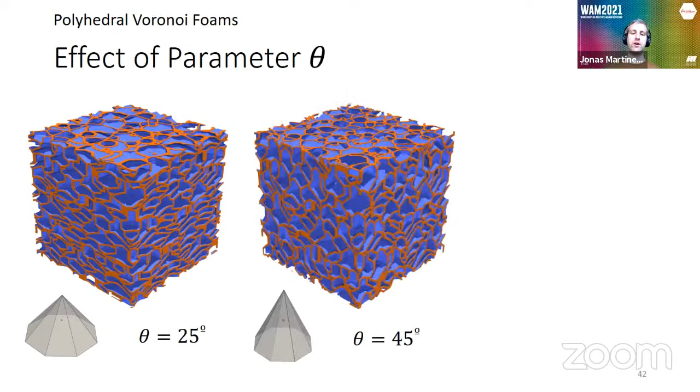Here you have a cone below with the parameter theta at 25 degrees, and you have the resulting stochastic microstructure. As you can see, you have something that's flattened, but your Voronoi diagram is always self-supporting up to this overhang angle. As you increase theta, for instance to 45 degrees, you'll see that this flattening elongates and you get things more elongated into the printing direction.

So what can we do? Always keeping in mind that we can do these gradations implicitly just by changing the parameters, as opposed to periodic tilings, we can change the density of the points that generate the Voronoi diagram. We can also, for instance, vary smoothly the density of the parameter mu that controls from non-vertical to almost vertical.

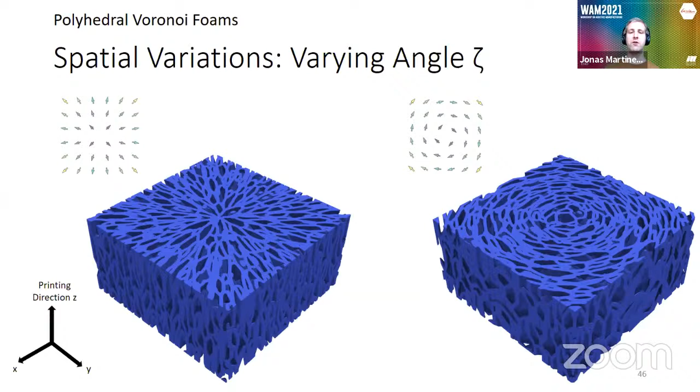So regarding the algorithm, it's procedural. At some point we have the current intersection, and we need to send the G-code to the printer. So we have a procedural algorithm that is very efficient to label what points belong to each cell. Then we extract the boundary, the interface between the cells, and finally we generate the path that follows.

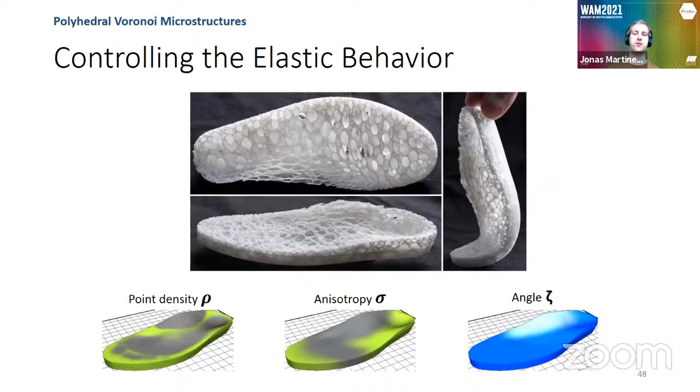So here you have another illustration. You have the parameters that we are controlling below - these are painted by hand. And as you can see, we can get interesting effects, for instance for the design of shoe insoles. We have an ongoing project with the hospital here in Nancy to design shoe insoles using different materials.

And finally, we did some periodic homogenization in 3D. Basically what we do is take different random realizations and assess that there is low variance of the homogenized elasticity tensor for linear elasticity. And we see that an orthotropic material was a plausible approximation.

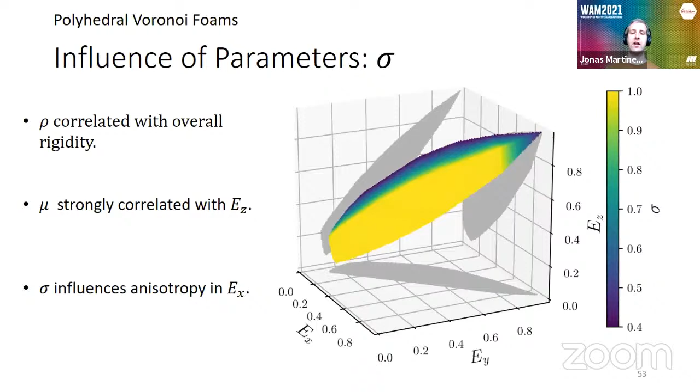And here you can see some points of the material space in 3D, so it also covers an interesting space. And here some manifold where we can see the correlation between different parameters. As you can see, there is a consistent correlation between different parameters and the linear elastic properties of the object.

And finally, we did also some very simple uniaxial tests to see if there is good agreement between the Young's moduli. And of course printing is always introducing anisotropy in the direction, so we also observed some anisotropy in the printing direction with respect to our numerical method.

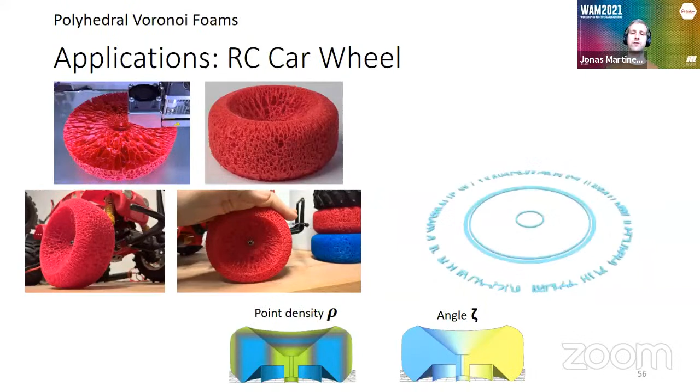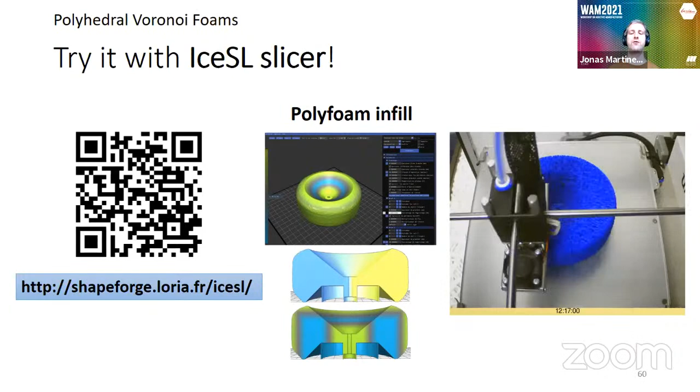So if you are interested in trying some of the techniques developed in our team, there is a software we are actively developing called IceSL. This software is basically a slicer and also has some modeling functionalities. With this software, you can use some of the infills that I have shown in this presentation. So I would like to thank you for your attention, and I will welcome any questions.

Thank you very much, Jonas, for this presentation on the use of additive manufacturing to create new material behaviors and functionalized parts. We are a bit late, so just a quick question from the chat from Mr. Wayne: how does the representative elementary volume work when you try to create a geometry that varies in cell size in a particular direction?

So how does the representative volume element... I think how you manage your homogenization of graded lattice structures, I think. What's the method we use for homogenization? Right, the geometry is evolving.

True that. In all the results here, we did homogenization considering homogeneous parameters in the sample. So that's right, that when you finally synthesize a structure at the end, you have spatially varying parameters, so we are not accounting for the variations with the homogenization. But the thing is that we are making an assumption commonly done with homogenization, that our structure is sufficiently small in order to get the average behavior. So that's right that for structures more like mesoscale structures, maybe the homogenization assumption is not enough, but in our case, it proved all right.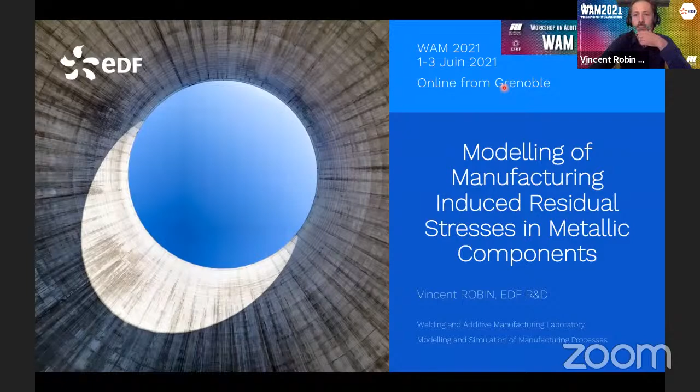Yes, this is the content of my presentation. So after a short introduction, I will detail what is computational weld mechanics, which is a field of simulation in mechanics that can be used to address residual stress issues in the industry for high temperature manufacturing and welding processes. Then I will talk about stress development during the process, and fitness for service considering residual stresses, and then it will be time for the conclusion.

So the scope of my presentation... sorry, I have just an issue with the Zoom. Okay, so the scope of my presentation concerns modeling of metallic components at solid state, considering continuum mechanics. So we will talk mainly on macroscopic stresses, and we are also interested in some mesoscopic modeling for some specific issues related to intergranular cracking. But for my presentation, I mainly discuss the continuum mechanics approach that is well disseminated and accepted in the industry.

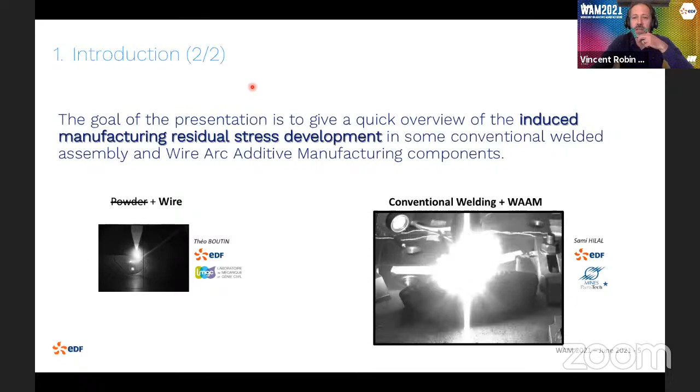So this is the second part of my presentation, which concerns computational weld mechanics, and I just want to detail the approach we have regarding a fusion process like a welding assembly or wire arc additive manufacturing. First of all, we have competence in the observation of arc processes, so in situ observation. The measurement of this physical quantity is very important in order to get input parameters for the models, but also to check if the results of the model are consistent with reality.

And then sometimes we also need to calibrate the model thanks to some experiments. And that is done using some in-house and open source software like OpenTurns, for instance, which is used to quantify the uncertainty, to calibrate the model, but also to convert physical-based models that are complex to handle into simplified models like regression or Gaussian process models that are very efficient for decision making.

So we can make the difference between two approaches. One approach which is mainly based on fluid mechanics, computational fluid mechanics, that is used to simulate gas flow close to the arc process and also to predict the weld pool behavior. But my presentation mainly talks about residual stress in the component, and for this, we mainly use thermometallurgical and mechanical models at the solid state.

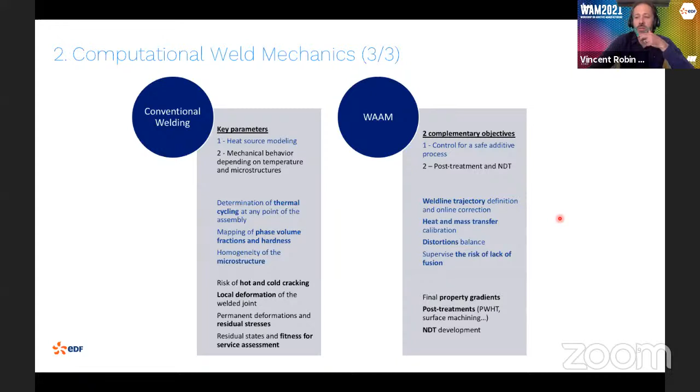And if we look at 3D printing using such a welding process, we have some other issues. The first issue, which we have discussed also for powder metallurgy based processes, consists in optimizing the welding trajectory, but also calibrating the mass transfer and the heat transfer, which is very important to prevent some risk of lack of fusion, for instance. And we have also to define welding trajectory in order to prevent distortions. And finally, but not least, post-treatment and NDT are really an issue regarding this process in order to be able to qualify such a manufactured component.

Let's go now to a short description of the way we validate our model in terms of mechanical behavior. We mainly base our approach on Satoh-like tests. Maybe some of you know this test. It's well known for welding applications, and this test is really interesting to reproduce the behavior of the material during successive peak temperature cycles that can be observed in the component during multipass welding or 3D printing.

It consists in using a round bar specimen, so it's a uniaxial test. And this round bar specimen is submitted to a realistic thermal cycle, fast heating and fast cooling. And we monitor the response of the material in terms of stress, so that we may have the stress evolution of the specimen during heating and during cooling. And the fact that you prevent shrinkage or strain, thermal distortion, thermal expansion, then you have compressive stress at heating and tensile stress at cooling.

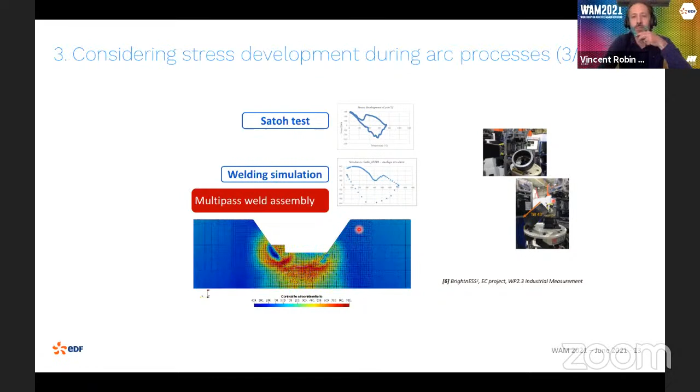A second aspect concerns the fact that we are not only interested in residual stresses, but also in the stress that develops during the process. This is important information regarding hot cracking issues, for instance.

We have developed a specific weldability test for which we can modify the external constraint so that it represents some realistic weld configuration. You can notice that the behavior in the heat affected zone is always the same: compression at heating, tensile stress at cooling.

And the other thing is that if you use transient analysis like we do for computational welding mechanics, you can optimize the strategy for weld deposition, reducing distortion, or sometimes also check to prevent hot points for residual stresses.

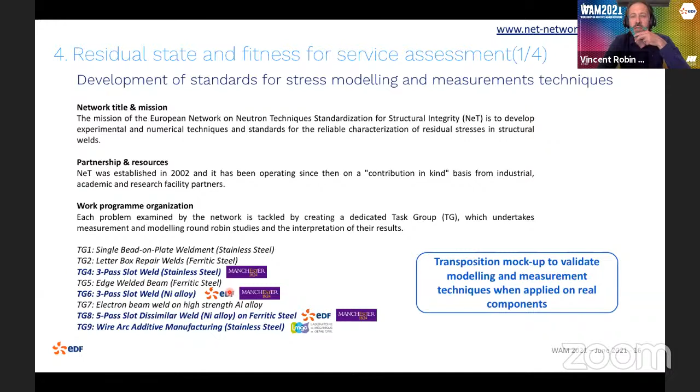There are still 4 task groups that are very active, and we are mainly working on what we call transposition mockups, that are used to validate modeling but also to give confidence in measurement techniques that sometimes cannot be applied on real components because those components are quite heavy and of large dimension. This is how we try to develop both experimental techniques and stress modeling for our application.

So just quickly some results from the 2 task groups that are largely active, and just to give you another view of the quantity, the amount of data that have been collected.

I would like to say a few words about fitness for service of components. We have to prevent our components from cracking, and damage in service can come from brittle fracture, from fatigue, or from corrosion.

We are not only interested in residual stress in the bulk, but also in residual stress on the surface, because generally the welds are machined or submitted to grinding.

That's the reason why we also want to develop some modeling and diffraction measurement approaches that can capture the residual stress close to the surface that may affect the residual stress due to welding.

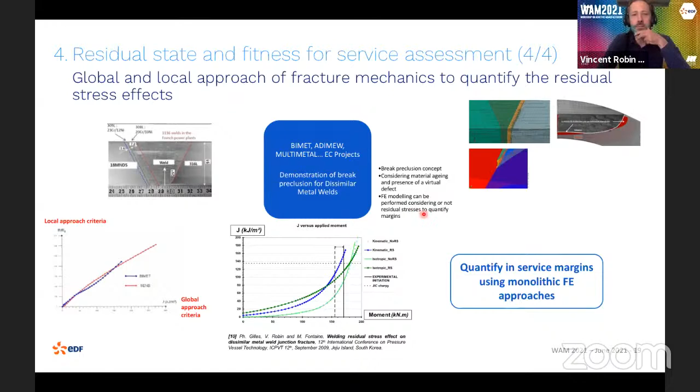So it's time to conclude. As a conclusion, regarding the fact we are interested in wire arc manufacturing, we have large operating experience in welding and based on the filler metal procurement requirements. That makes wire arc additive manufacturing interesting for pressure equipment manufacturing and also repair.

The message I will say also is that we need to complete finite element modeling prediction with non-destructive techniques. It is really important to show that the model is predictive, and measurement techniques are necessary to make the transposition I was talking about, from the mockup to large equipment that cannot be easily produced, and also for which non-destructive methods are quite costly.

I will also say that simulation of experiment is necessary to determine key non-observable physical constants. For instance, knowing the level of stress at a specific location during a weldability test. And also we are working now on monitoring and in-situ measurement, which is relevant to understand the physics, to identify correlation between key process parameters and material processing, and also to define relevant input parameters to have the right level of modeling, and also to collect data for machine learning.

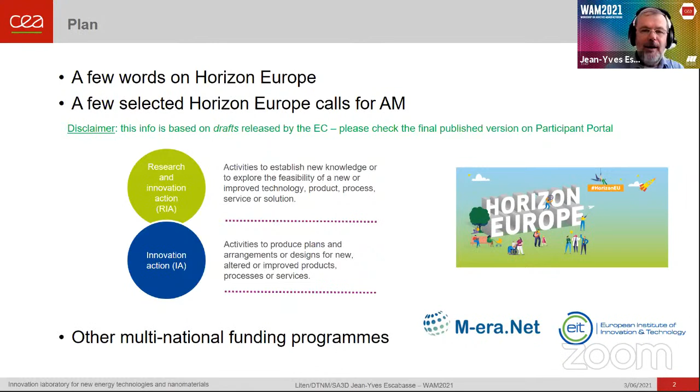We will concentrate on two actions: the research and innovation actions, the so-called RIAs, so activities to establish new knowledge, really research to explore feasibility or new improved technology, process, product, as compared to innovation actions, IAs, activities to produce plans, arrangements, or designs for new products or processes. They differ in content of activities and, of course, in TRLs. RIAs start at TRLs around 3, end TRLs 5 or 6, and innovation actions will start at 5 and mostly end at 7. We will have a look at a few other multinational funding programs, so M-era.Net and EIT.

I suppose you all know Horizon Europe. We will concentrate, let me display my pointer, on pillar 2, and more specifically on cluster 4, that's digital, industry and space, and on cluster 5, that's climate, energy and mobility.

So what's new in Horizon Europe versus Horizon 2020? Not a lot of things, but significant changes. Now the calls are oriented on outcomes, which is very important. Horizon 2020 already put a lot of emphasis on the impact of projects, but now the calls just start with outcomes, what the Commission is expecting. That's basically what I'm going to show you today in those selected calls.

Another big change is that the calls are no more focused on technology, they are focused on the outcome. So you will get more liberty to propose technologies to the Commission to fulfill these outcomes. And since they are no more devoted to single technologies, for instance, calls on manufacturing are very open. You can propose additive manufacturing, but also casting or injection molding or whatever.

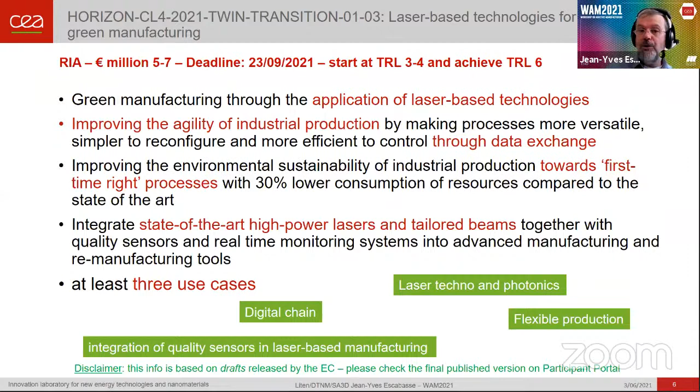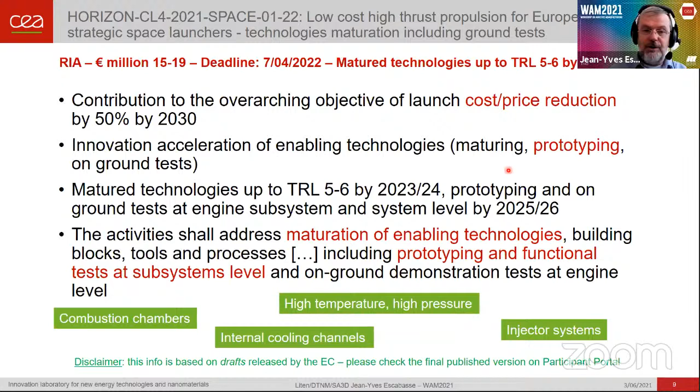This can address combustion chambers, so high temperature, high pressure, internal cooling channels, but you can also address injector systems. Even if this is a RIA here, state of the art is there, and there have already been some publications on this.

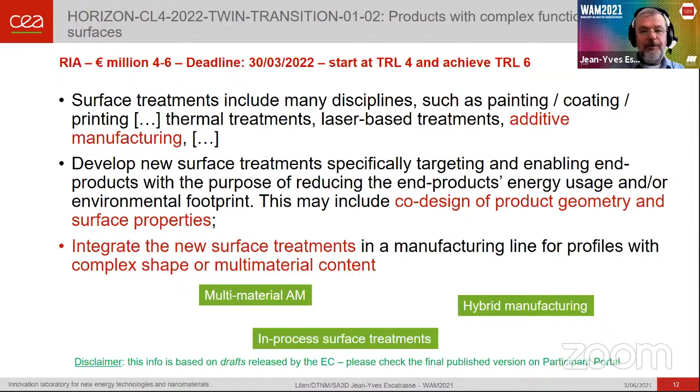And of course, I'm repeating myself - don't work alone, you have to work in a value chain. So multinational funding doesn't only mean Horizon Europe. There is the European Institute of Innovation and Technology, the KICs.

So the KICs, compared to Horizon Europe which networks you for research and gives you money to develop knowledge, network to integrate education, research, and business, and they want to generate impact, produce economic value. So they convert knowledge into products and services in order to introduce the technologies to the market.

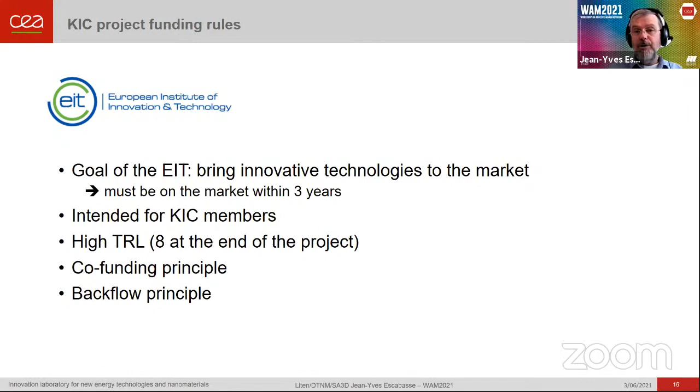Co-funding principle means you don't get 100% funding like in Horizon 2020, more likely 70%. Backflow principle means you have to refund the money afterwards if your project works. You have to introduce a backflow plan in your proposal, which will be evaluated. If the Commission or EIT evaluation panel deems it not credible, you get penalized, since they want to see their money back. So that's really a drawback.

There's also the ERANETs, for instance the M-era.Net, M for materials, modeling, functional materials, additive manufacturing. There's a call open until the 15th of June for the pre-proposal, so it's still feasible.

Just to recall what ERANETs are: they are European networks of funding agencies in the EU. They were funded as an instrument from FP6, so quite old, funded as CSAs, aimed at fostering transnational collaboration between member states. Now they've been superseded by more modern instruments like Article 185 initiatives, Eureka, or joint undertakings, but they still exist—there are still a lot of them active, in particular M-era.Net.

They have joint calls, and projects are funded nationally, sometimes with additional European funding. Project partners are funded by their own national funding agencies—for instance, in France it's BPI or ADEME.